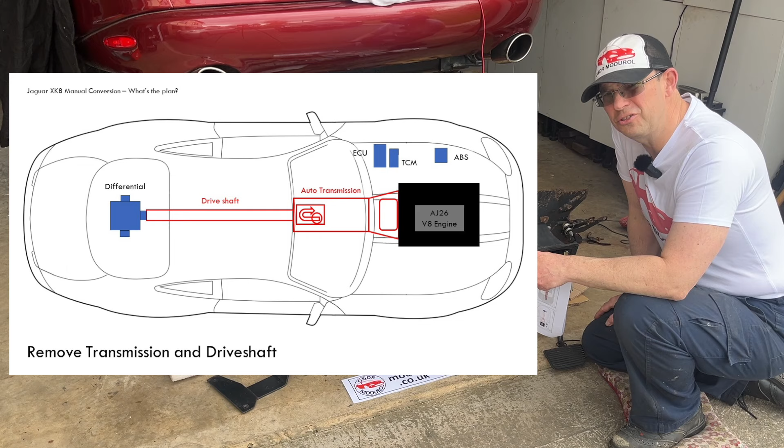So the simple idea is just to take out the transmission and the drive shaft, very simplistically, then mechanically fit this new gearbox, a shortened custom drive shaft and a clutch pedal, which is what I'm doing here. That's the mechanical side, very simplistically and quickly - it sounds simple.

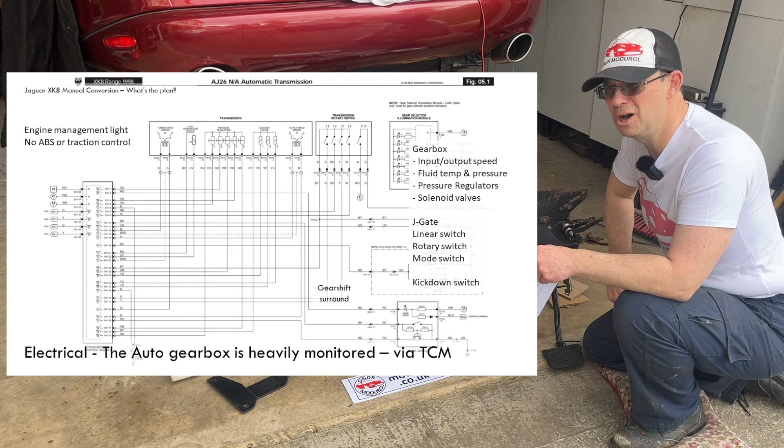Then electrically, as I say, we're on CAN bus version 1. Taking out the automatic transmission throws lots of electronic and control problems, because the automatic gearbox is heavily monitored - it's actually got its own module, so it'll throw up lots of CAN bus errors, wrong gearbox, etc. So the idea is I've got a black box, actually silver box in our case, that when plugged into the loom, should send signals to the TCM, the transmission control module, telling it that the gearbox is still there. Very simplistically thinking, that's the idea.

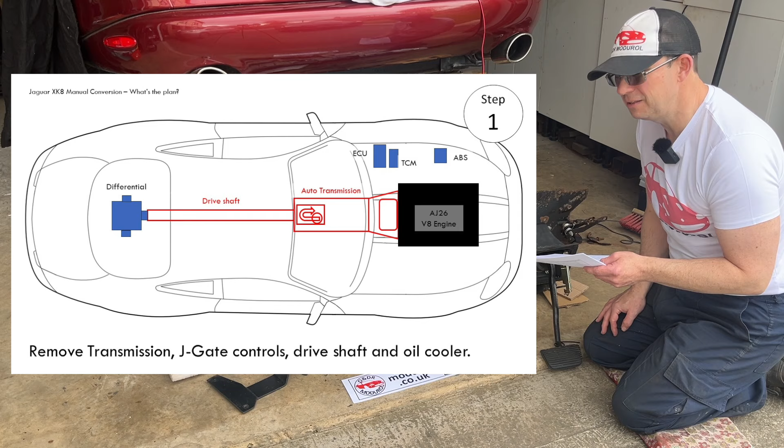It's not that simple. So what is my build sequence to try and make all this work? First of all, I need to remove the transmission - basically remove the actual gearbox itself, which is reasonably simple, I believe. I haven't done that yet, but I'm going to. I've also got to remove all the J-gate controls out of the centre console, the drive shaft obviously, and the oil cooler lines. I'm going to take all that out and show you. So that's step one, removing all the existing automatic support and the gearbox.

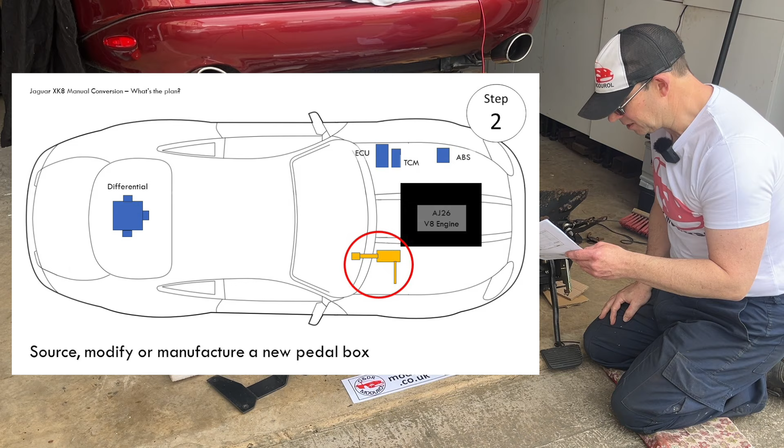Second stage then is going to be to source, modify and manufacture a new pedal box, which is the really interesting bit. I've got a new pedal box here, or a new second-hand pedal box - interesting, this is the 4-bolt. I'm going to upgrade my servo while I'm at it, which is probably going to be the subject of another video, but hopefully I'll modify this to make it work, or there are lots of other ideas which I'll come into.

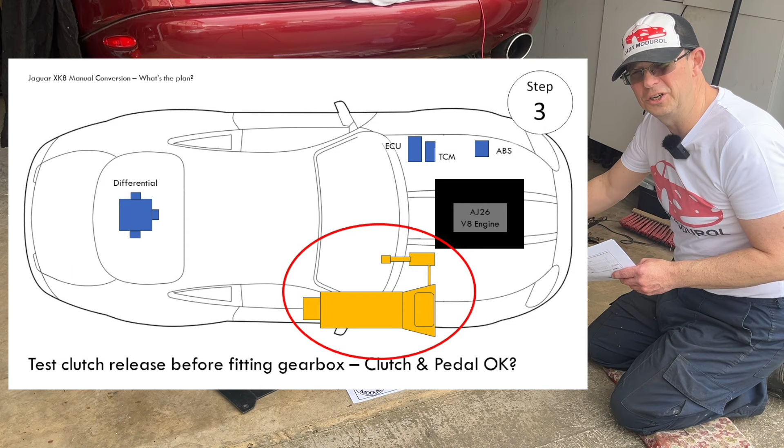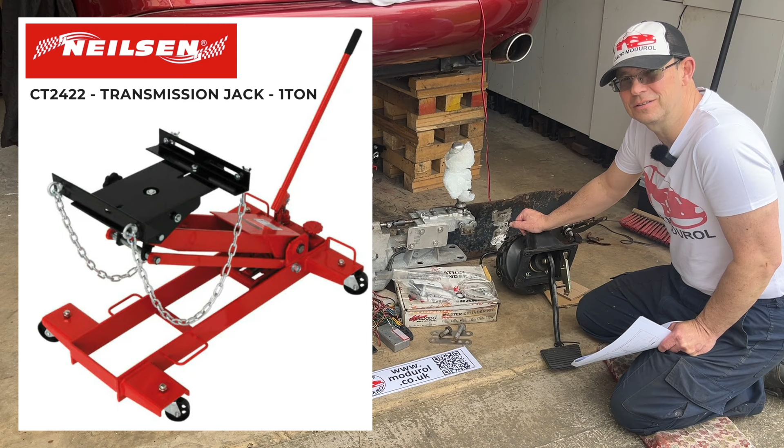Stage 3, or step 3, then. Once I've got my clutch pedal in the car, I need to test it works before I bolt the gearbox back in. I have bought quite a decent low-rise transmission jack - I spent a bit of money on that, albeit it was second-hand. The idea being that this gearbox is going to come in and out quite a few times. I'm under no illusion that I'm going to have to take the gearbox in and out loads of times.

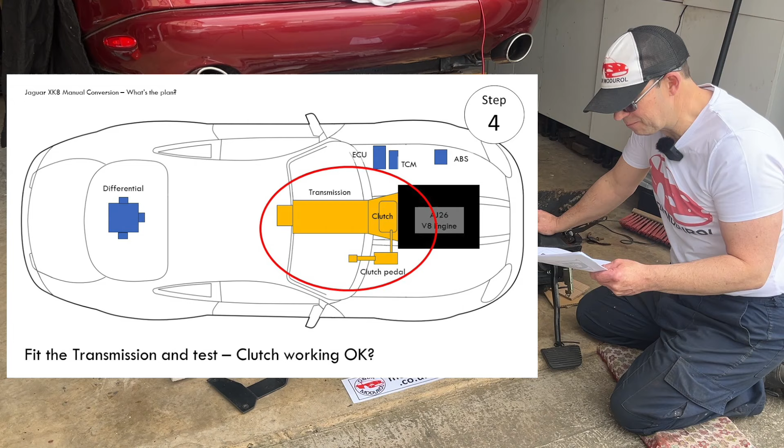So once I've got the clutch and the clutch pedal working okay, step 4 will be to actually fit the transmission and test it, ideally with the engine running, albeit up in the air, and make sure the clutch is engaging and disengaging and everything's working okay.

I've got to set a gap between the clutch and the throw-out bearing, which I'm not quite sure how to do. So that's the milestone, if you would, or the problem to overcome then.

Then step 5: when you fit the clutch pedal, the brake servo's got to come off, so all the brakes will need bleeding. So I'm going to have to do that. Fit the differential, which I'll come into later. Fit the drive shaft and actually get it up and down the drive and see if it'll power forwards and backwards. So that'll be step 5.

Step 6 then, I need to refit all the exhaust. Obviously I don't want to do that early, this is the idea of the steps. If I fit the exhaust too early, I can't get the transmission off. Then if there's a problem with the transmission, I've got to take the exhaust off again. And you get the idea of why I'm trying to do this sequence.

So step 6 then, refit the exhaust and then try and get this black box working. And in theory, if that goes okay, give it a bit of a road test, get it down and get it MOT'd. If that all works, I'll be really, really happy. In fact, I'll be ecstatic.

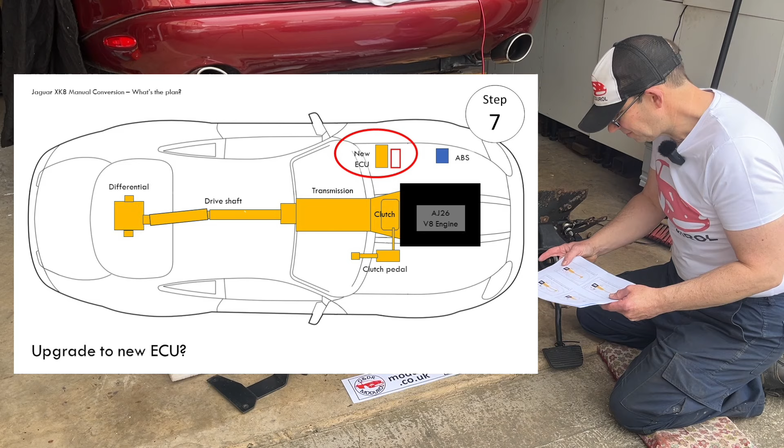The further steps I'd like to do: obviously this black box thing is a bit of a compromise. I'd like to replace the ECU, which is another expensive step, but I'd really like to do that. I think there's lots of positives in doing that.

And then step 8, obviously with a manual gearbox, probably the brakes won't be quite up to it. I've got 305 diameter front discs and rear discs. It's not the greatest braking system, albeit I'll have an uprated servo. So I might go to the 325 upgraded discs. I've already got the caliper carrier to do that, or possibly even go the Brembo 355 diameter. But anyway, this is long distant plans.

And then the suspension, will it cope with this enthusiastic driving? Potentially I've got to upgrade the springs, etc. But everything is fairly new. I've refurbished everything, everything is rebushed to OEM spec, so maybe not. I've got CATS suspension on this, so maybe I don't have to do that. Anyway, that's my sequence of steps.

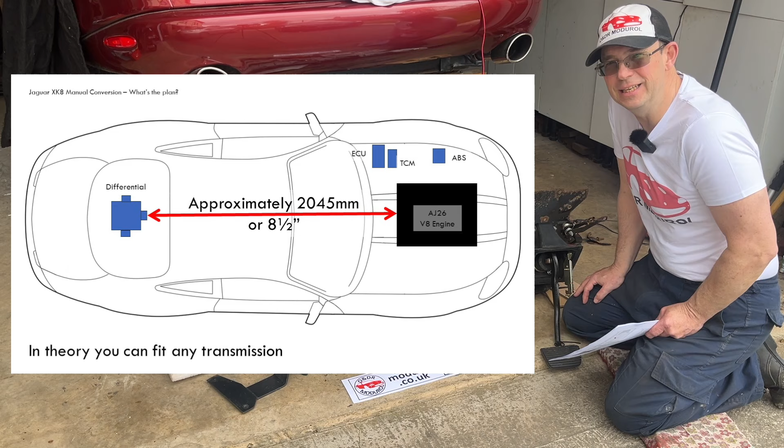The choice of the gearbox then. Okay, so in theory you can fit any gearbox if you want to, any gearbox at all. There was an example which I saw originally when I was contemplating doing this. There's a guy, I can't pronounce his name, he actually converted an XJ8, the 3.2 version, using a BMW gearbox and drive shaft. I'll show you here.

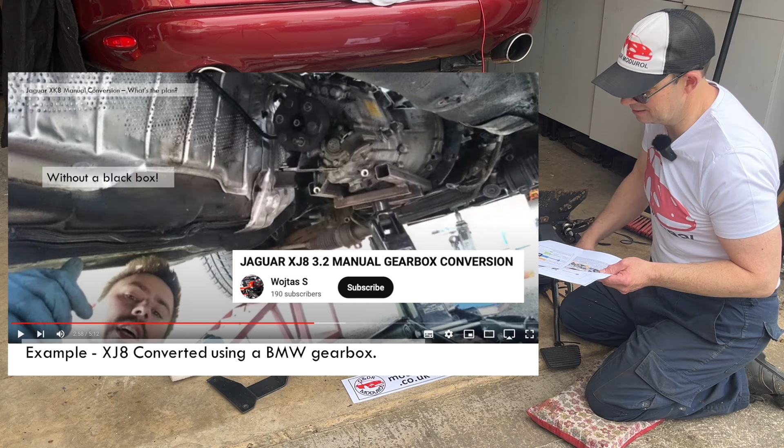And he did that without using a black box or a piggyback ECU, which is really interesting. He basically left everything plugged in. I'm not quite sure how that all worked, but interesting.

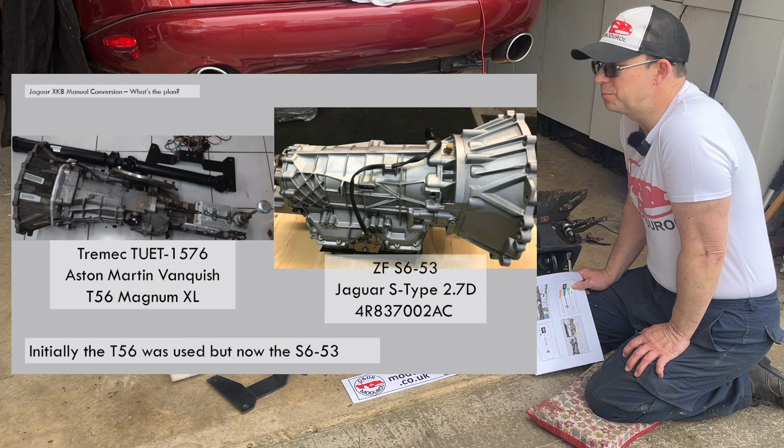But previously with the XK8, people initially used the T56, which is what I've got, but then later they started using the S-type 2.7 gearbox, the S6-53, because obviously there are lots more diesel S-types around than Aston Martin Vanquishes.

So comparing the drives, I'll show you here: the ZF version is in the middle there, in blue. At the top there you've got, in orange, the Tremec T56 version, which is what I've got. That transmission is massive. It's actually really long. The output shaft is actually here.

It's got a really fancy name, what is it? The T56 XL Magnum, or is it Magnum XL? It sounds a fantastic name. Absolutely fantastic. Anyway, it's really long, so it needs a shortened drive shaft. And there's a gearing issue, which we'll come into.

But I believe the ZF diesel manual box, the S653, is actually a little bit shorter than the automatic gearbox you're bringing out, and you can use a Jaguar 4.2 litre drive shaft for that. But I don't 100% know that because I haven't got the other gearbox here with me to check it. If you know, please could you add it in the comments.

The actual Vanquish, or this Tremec gearbox, I'm going to call it various things, but that's actually 415 pounds-foot torque, whereas the diesel Jaguar S-Type one is 442. So it's quite a bit higher spec for torque.

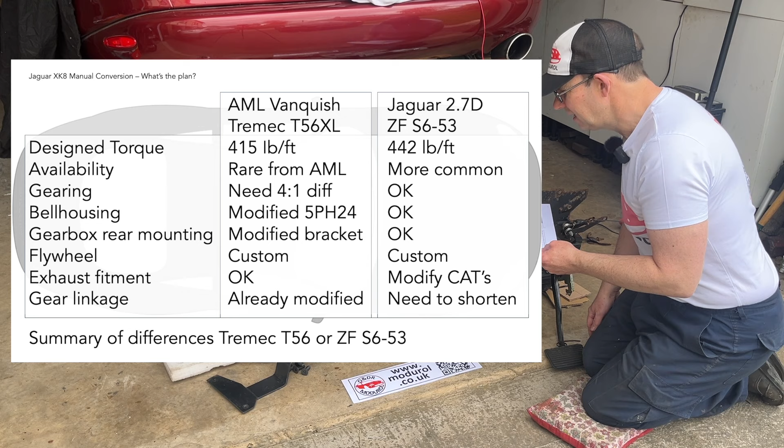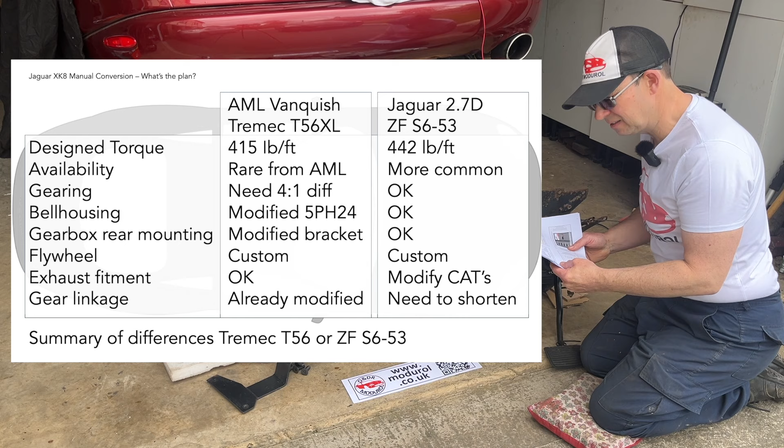The availability side. Obviously there's not many Aston Martin Vanquishes with manual gearboxes, and very few of them have been scrapped, so the availability of this gearbox is quite limited as opposed to diesel S-Types. However, that's in the UK; possibly in America the Tremec gearbox is going to be a bit more common. It's used in lots of high performance equipment, high performance cars, so maybe that's not quite the case in North America.

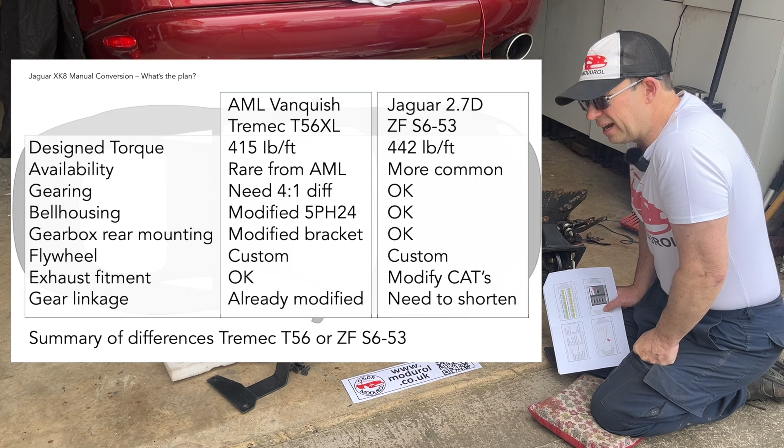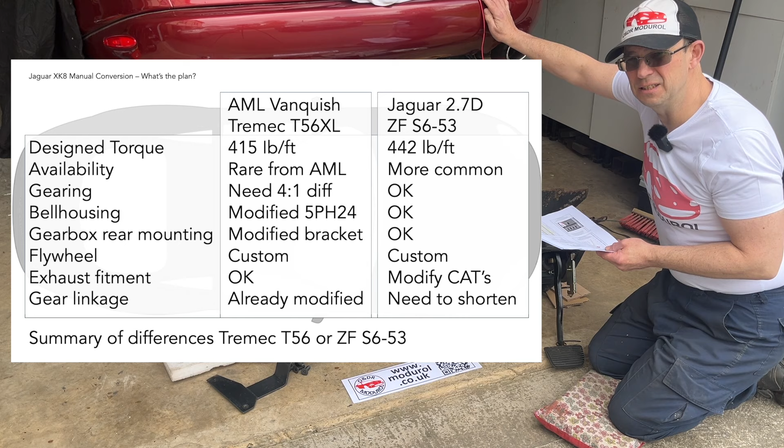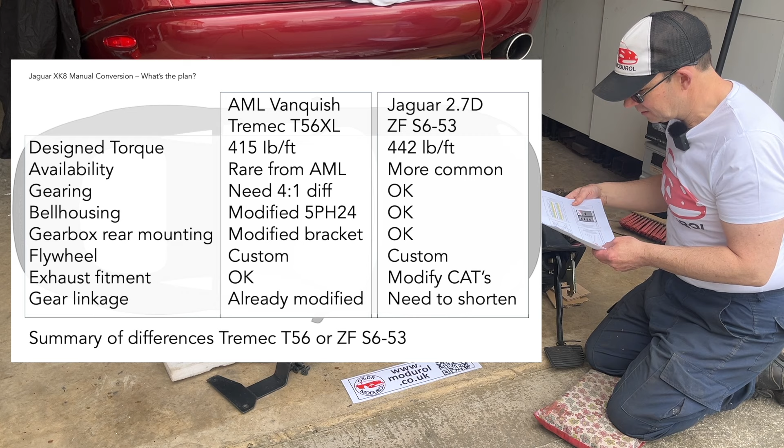The gearing then: this gearbox needs a 4:1 diff, no doubt about it, whereas the S-Type one doesn't need any diff mods, albeit you've got to remember this XK8 doesn't have a limited slip diff, so that is a big problem, particularly if you want to drive enthusiastically, let's say. The gearbox mounting, I've got a modified bracket here. I believe the S-Type doesn't need any modification for the bracket. Both need custom flywheels. The exhaust fitment is different, which we'll come into in a moment.

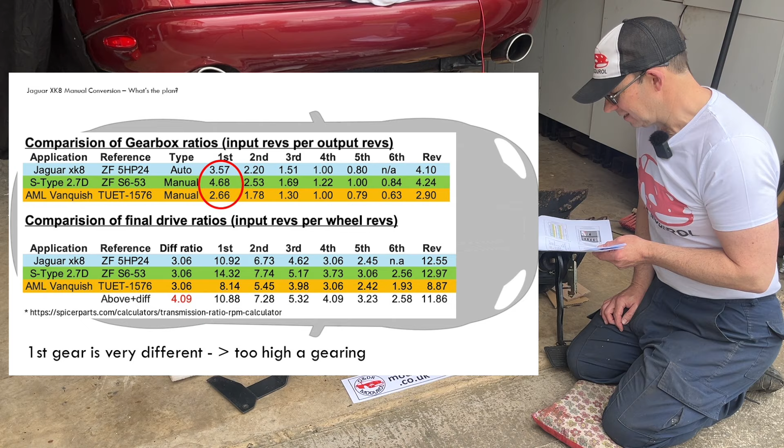So let's talk a little bit about gearing. I showed you this one in the previous video, comparison of gear ratios. And you can see here again, in first gear, this gearbox is really, really highly geared. So basically you're going fast for the input revs to output revs. So first gear is very different, and to me, I don't like that. And reverse, if you're in a car park, it's going to be difficult to control. Clutch control may be a problem.

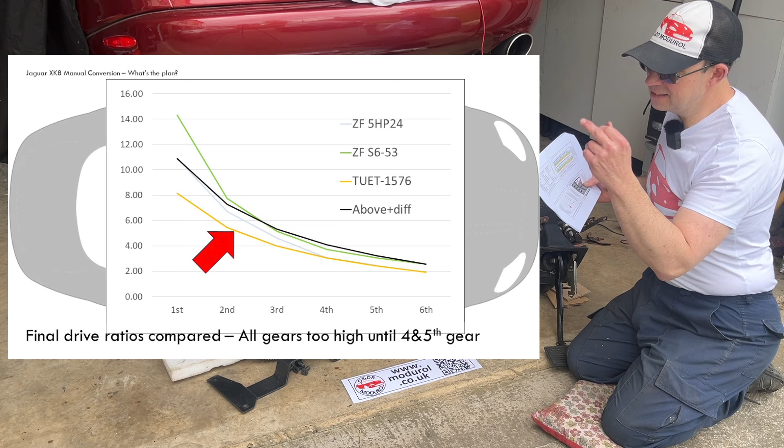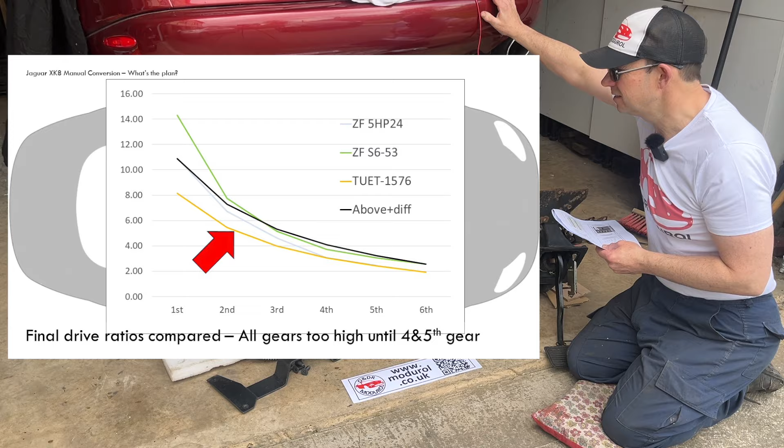If you see this graph here, you can see all the gears are quite different, with the 3:1, or 3.06 if you're going to be technical, to 1 rear diff. You can actually calculate that this gearing has a top speed of 198 miles an hour. I've worked that out basically on 4,750 RPM, which on the standard car is equivalent to 155 miles an hour. So I think that's the RPM achievable, and possibly theoretically the car could do 200 miles an hour with this gearbox, but I don't think that's going to happen.

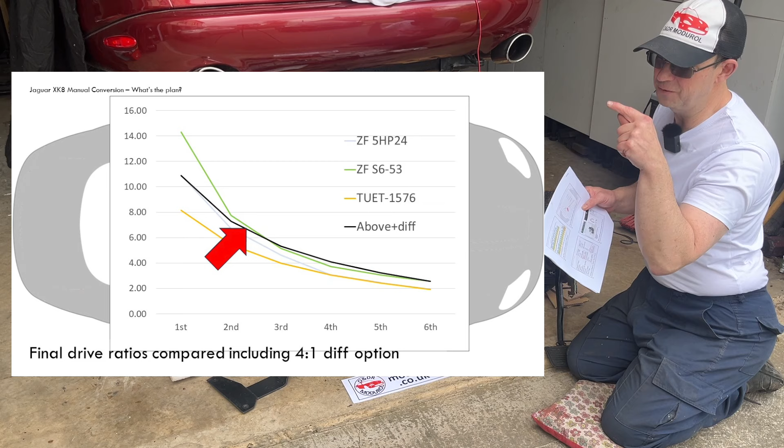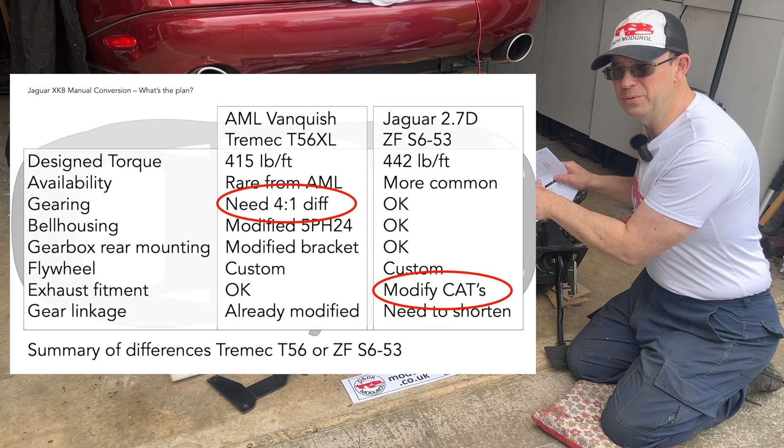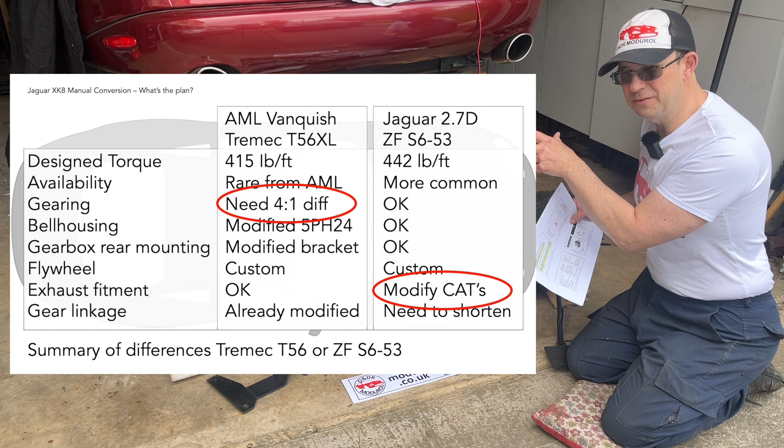So the idea really, if you put a 4:1 diff in this, it's the black line here, it brings everything back to normal. So that's definitely the route I'm going to go. If we look at the two main differences, I was actually contemplating dumping this project. I know it sounds funny, but the main difference is I need to buy a diff, but if I went over to the S-Type gearbox, I've got to get a different custom flywheel because the bell housing is bigger, I need a thicker flywheel, etc. But I'll possibly go into that in a later video. The main difference is the cost.

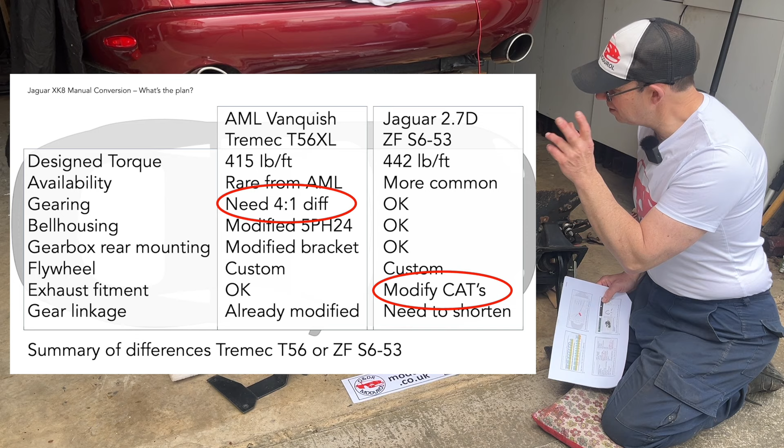It's either the cost of the diff or the cost of cats. Obviously on the S-Type diesel, the catalytic converters need to be modified to clear the big bell housing because of the dual mass flywheel on the diesel. The bell housing is quite wide, and it interferes with the cats.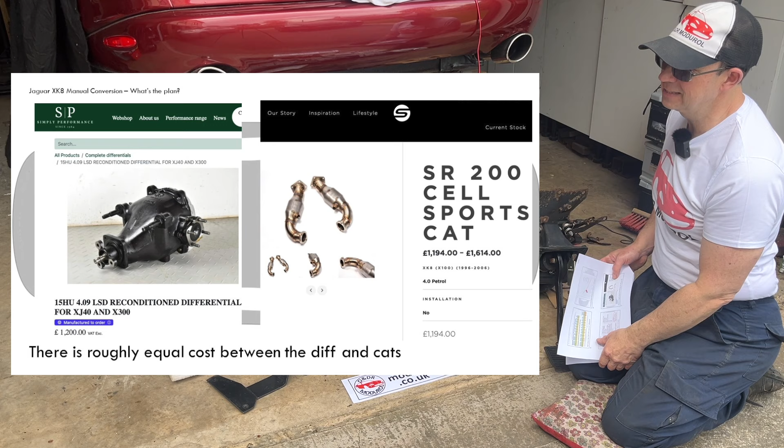Okay, so looking at the cost of both, a diff from the earlier Jags costs you just over £1,000, 1,200 quid, and the cats are retailing 1,200 to 1,600 quid, albeit the diff would have some sort of LSD in it. So that's the difference. So I'm thinking I don't need to dump the project because I've picked the wrong gearbox. I'm going to give it a go. I do want to have a limited slip diff, so changing the diff maybe isn't too big a deal.

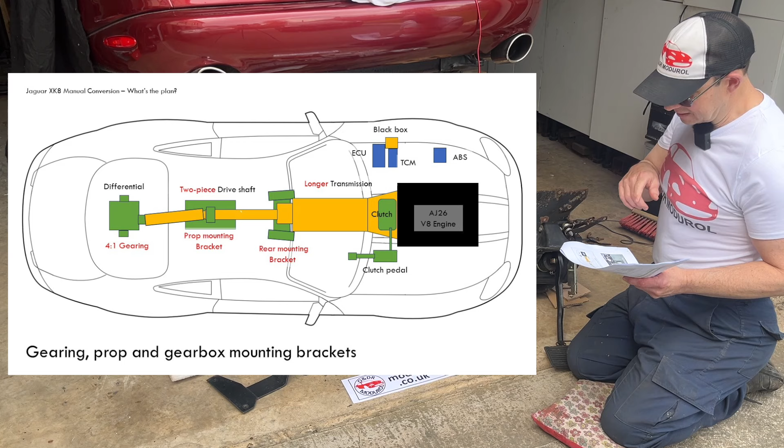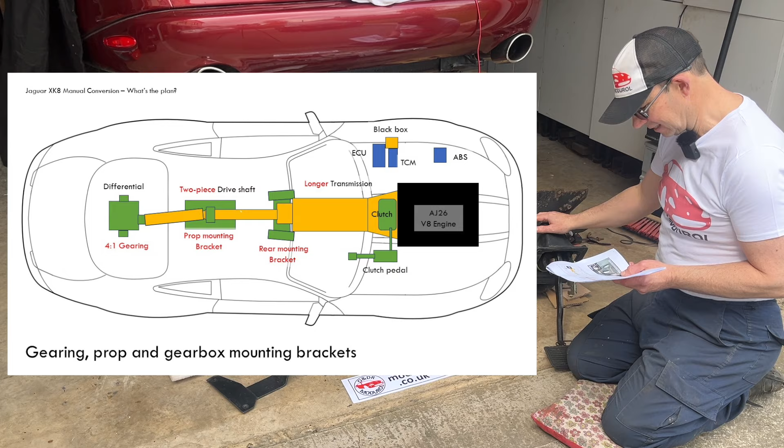Okay, section 4 then, problems to solve. So what problems have I got left? I've got the gearing. I need to sort the diff out, or the prop. I needed this plate I bought to support the two-piece bearing mounting. I need to sort the gearbox mount. I don't think these are all problems. Basically the pedal box is probably the big one. So I need a clutch pedal. As you can see here, I need a third pedal.

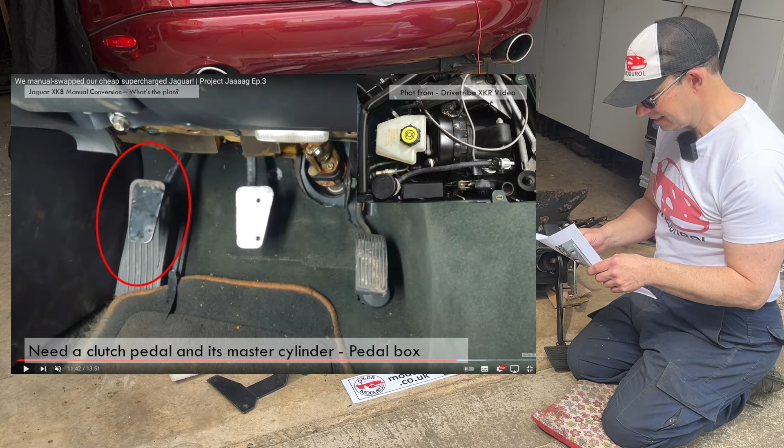It's quite tight in the footwell of the Jag, so fitting one in there is a bit of a problem. I'm actually just calculating pedal spacings. I'm measuring all the car's pedals. That's a bit daft, but that's what I'm doing in a minute. So I've got several options.

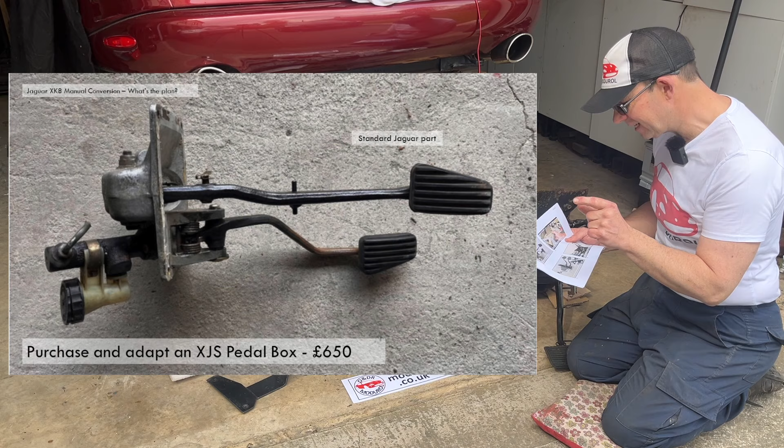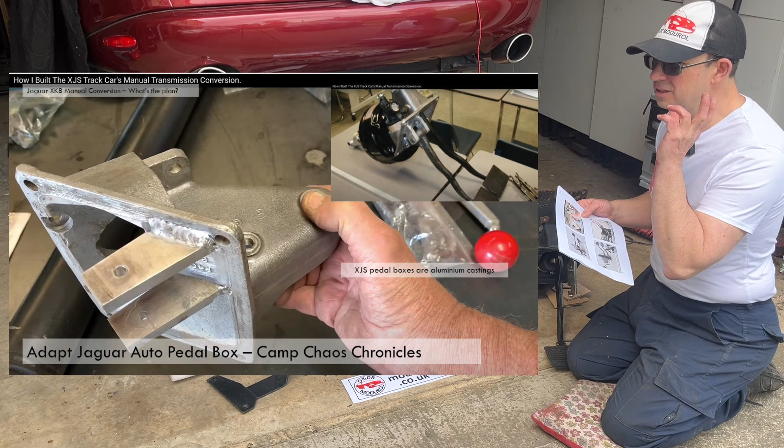I can either purchase or adapt an XJS pedal box, which you see here, they're retailing anywhere up to £650. That was an XJS manual box. I can actually adapt an old Jaguar auto pedal box.

If you're interested, Camp Chaos Chronicles, I'll put a link here. He's done lots of videos about doing that, and it's really interesting, quite doable. And then thirdly, I can modify and add the mechanism to an existing pedal box.

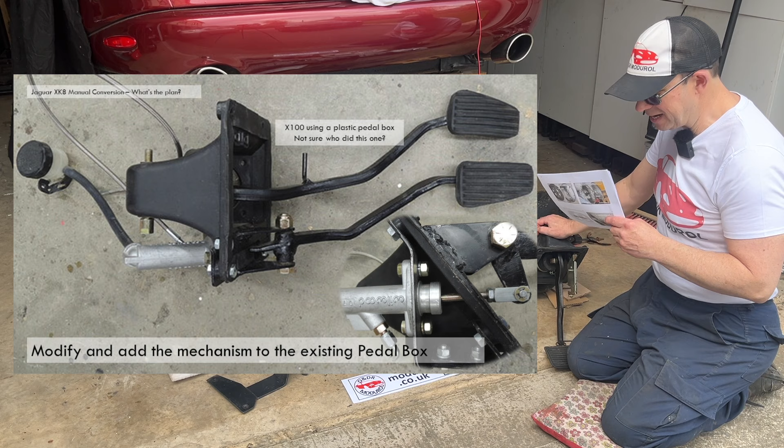On the XK8 it uses a plastic pedal box, and the idea is to fabricate metal brackets around it and add the pedal into the same pedal box. I think that's probably favourite at the minute.

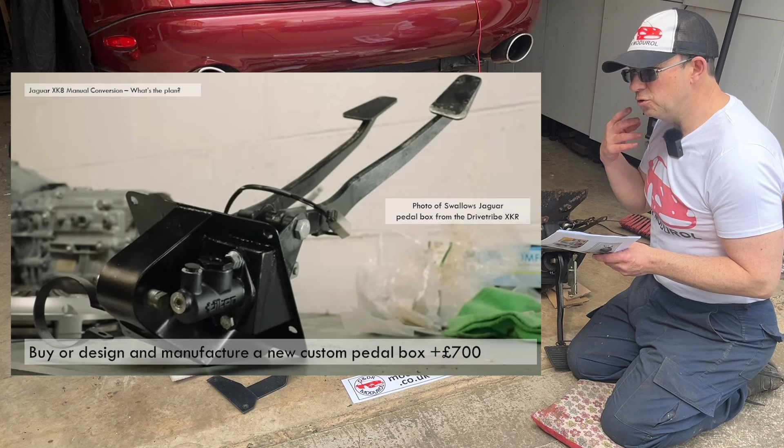And lastly, I could actually buy or design and manufacture a completely new pedal box, i.e. fabricate a steel one, and that's what quite a few people are doing, including Swallow's Jag, which you can see here. I think their pedal box is something like £700 plus VAT. So those are the options for the pedal box.

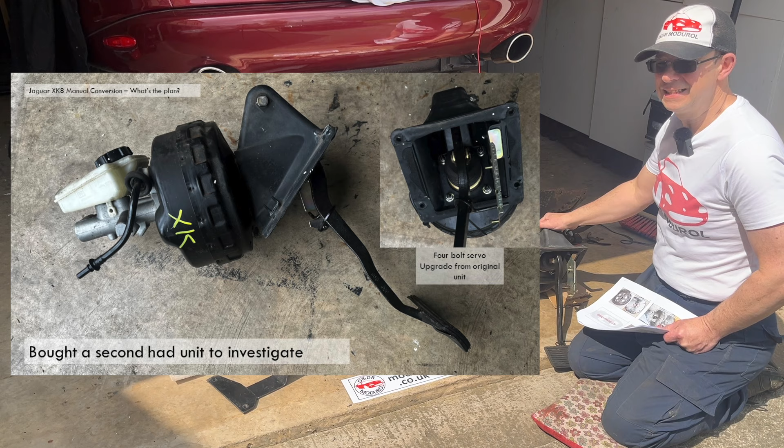But what I've done, I bought a second-hand unit, and I think this is actually a 4-bolt servo unit. In theory, my existing servo is 3-bolt, and they upgraded this so that per millimetre of pedal travel it gave double the pressure. There were some complaints on early cars that the pedal travel was too long. So this is the upgrade for that.

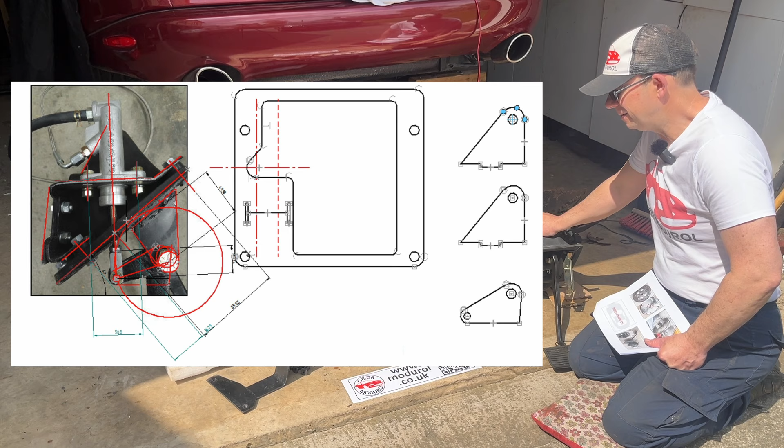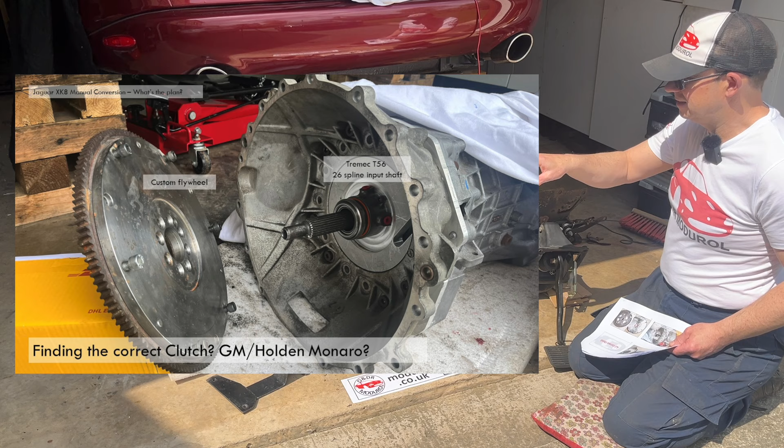So at the moment, I'm on the CAD comparing all these different ideas, and I'm measuring this up, and I'm going to make a decision what to do. The next question is finding the correct clutch. As you can see, I've got this custom flywheel, and I've got a Tremec T56 gearbox with a 26 spline input and a 3/4 pilot shaft. And I need to understand what clutch is to go in there.

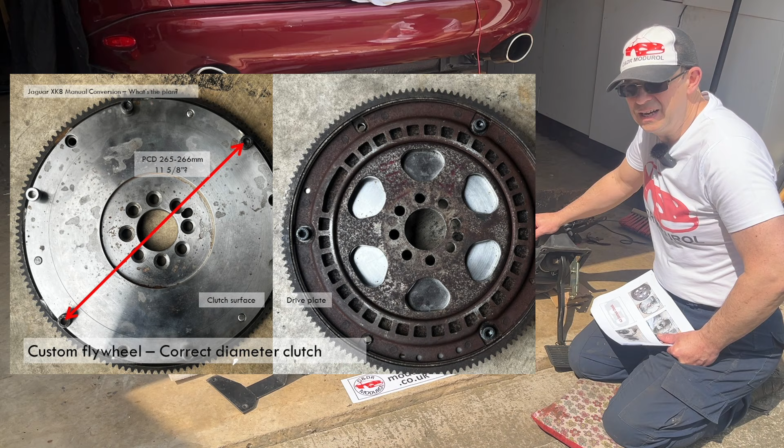The previous guy who sold it to me said it had a GM Holden or Vauxhall Monaro clutch in it, but I don't think it's that, because when I researched it, their clutches are 11 inch or 11.5 inch diameter, and on this modified flywheel the PCD of the clutch clamping plate is 265 or 266 millimetres, which turns out to be 11 and 5/8 of an inch, which is quite common on GM Chevrolet applications.

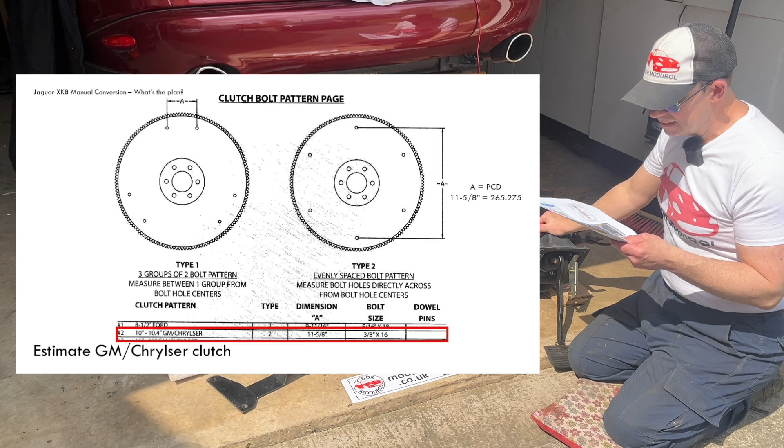So I think it possibly isn't a Monaro clutch. It's probably a GM clutch, but I really need a bit of help with this. I did email various clutch manufacturers and suppliers, and one guy, which I'll come to later, gave us the lead here. There was a GM Chrysler clutch at 10 to 10.4 inch diameter, which had the same PCD, and that was probably the one.

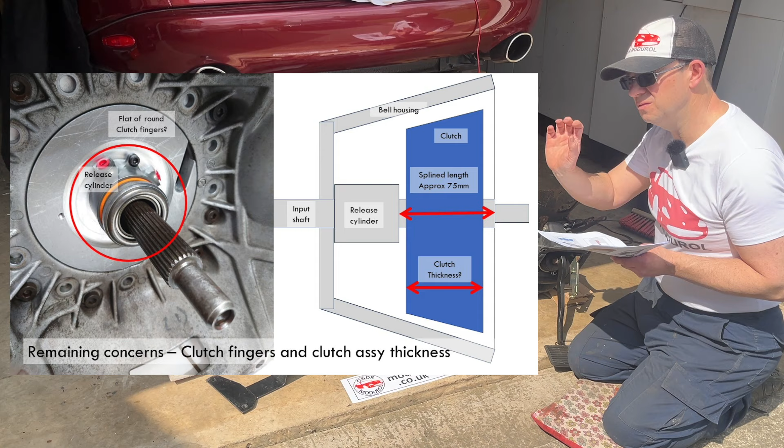So I've got a bit of a lead, but I was a bit concerned because I've also got a throwout bearing already, whether it needed particular clutch fingers, because the fingers on the end of the clutch mechanism can be round or flat. Plus the overall depth of the clutch, I've got about 75 millimetres of spline length free, and if I buy a clutch it might be too thick or too thin. So if you've got an idea what clutch to put in it or how to work it out, I'm really interested to find out.

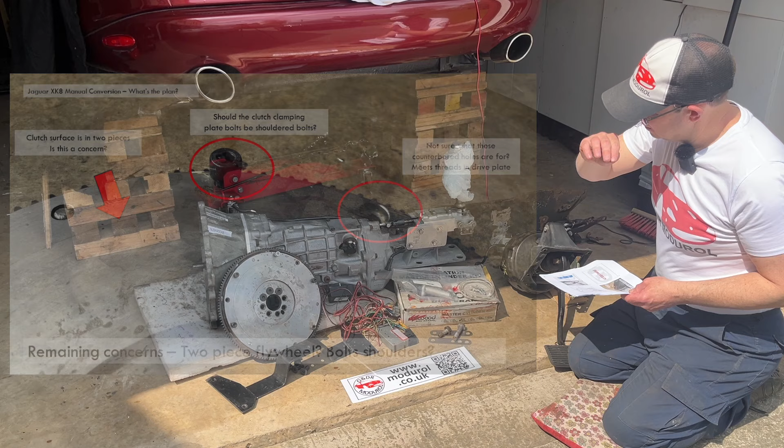But also on the clutch surface of the flywheel, I'm a bit concerned because it's actually two-piece. There's a line, which I'll show you here. It's two pieces, which I'm not quite sure why. And then the clutch clamp plate bolts. When I spoke to clutch suppliers, they told me you need to fit shoulder bolts. I'm not sure why that's the case.

And I've also got 3 counterbored holes. I'm not sure what they're for. There are threads on the other side of those counterbored holes to the drive plate, the flex plate behind it. They're missing them, and I'm not sure if I need them or not. And finally, I've got an issue with the spigot.

So at the end of the input shaft, there's this 3/4 pilot diameter. This needs to be supported by a bearing or a bush, ideally in the crankshaft or within the flywheel. I did measure the inside of the flywheel, and it's actually 2 inches, which I believe is to locate on the end of the crank. I'm not sure whether I fit a 2-inch bearing in there, or whether there's space in the actual crank itself, because I believe there's a bit of a spigot on the end of the torque converter that engages in the drive shaft, into the crankshaft.

So really, until I get it out, I'd be interested in anybody's idea there. I think the initial cars with this mod had bronze bushes, oil-filled bronze bushes, but if you know which bearing it is, I'd appreciate that help too. So there you go, there's some of the problems I've got to fix and help I need.